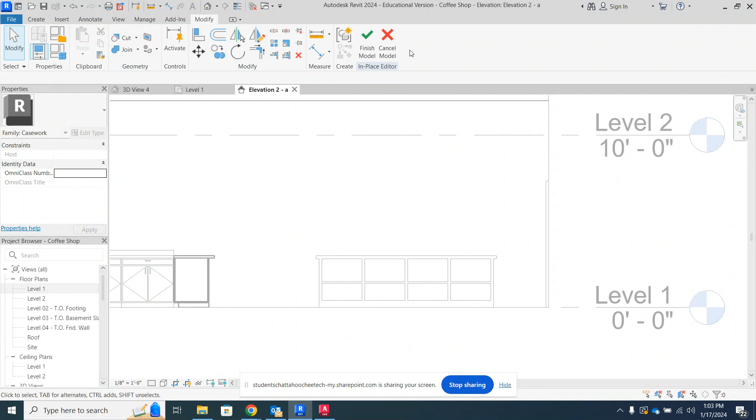Now we're going to work on the upper part of this shelving unit. So we're going to do the same thing. Let me get out of this. You're going to go to Architecture, Component, Model in Place.

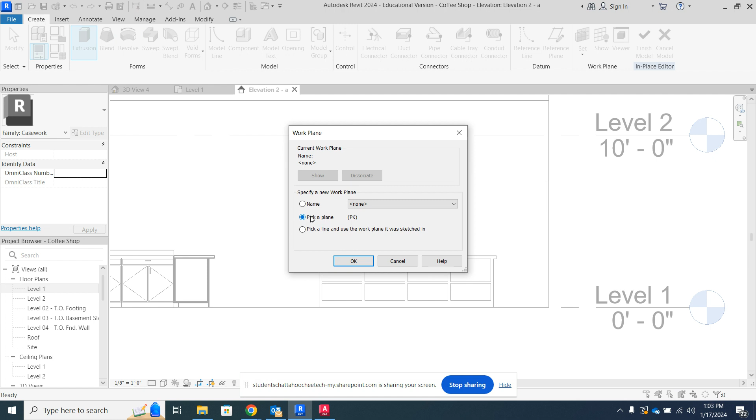Again, we'll choose Casework, give it a name, Shelf Upper Unit. And then we're going to choose Extrusion again. Make sure we're on Pick a Plane so we can choose which surface. Lots of times I'll scroll out a little just so it makes it easier to make sure I've got the top and the bottom of that wall. And then when it shows me my lines, I know that I've selected the correct one.

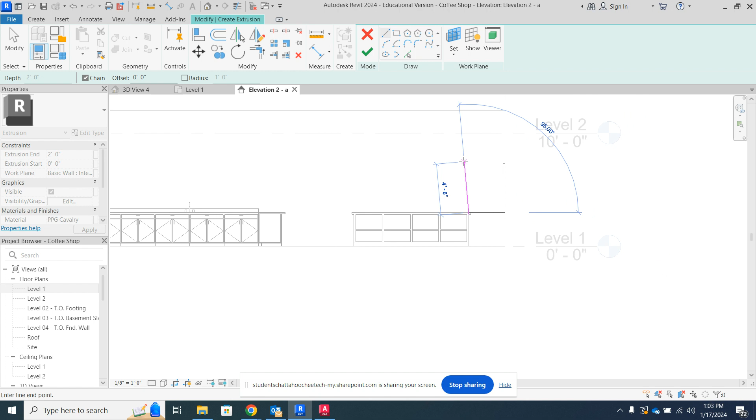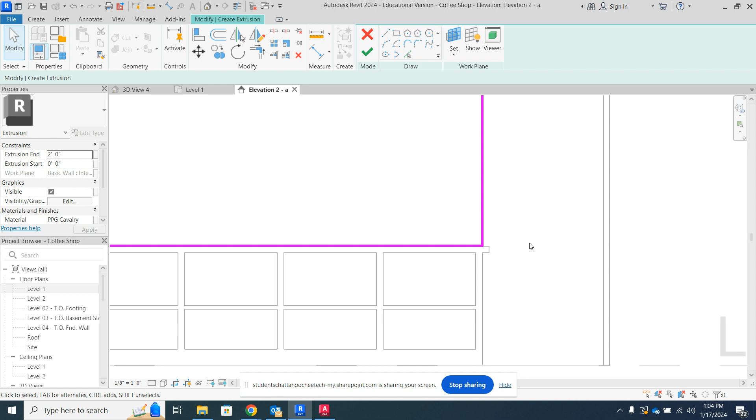So again, you can use your existing lines to start from. Since the bottom is 3 feet, I'm going to make this top 6 feet, so we get a total of 9, and then 10 feet should match up right where we want it. This will use these lines that are here as guide points, but it's not going to connect the surface to it, so they're still going to function as two separate pieces. I'm going to get rid of my starting line there.

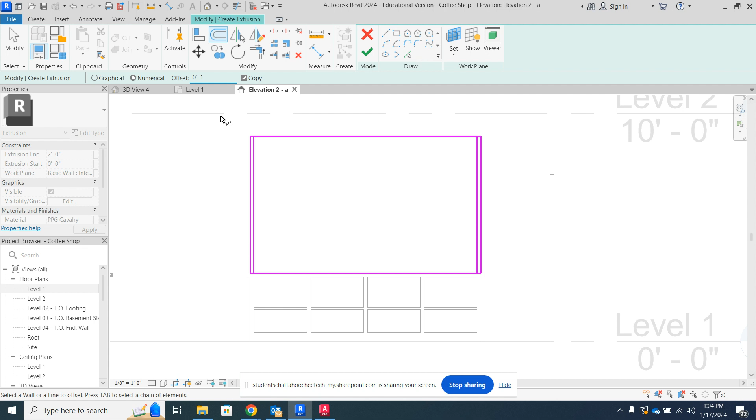So same thing here. You will go in, you can use your offset to create the edges of it. I'm going to do a little bit less at the bottom. So that's here. And then we'll go a little higher at the top. So we have all of that. And then same thing, you'll need to make sure that all of these are clean so that you don't have any lines intersecting as you go through.

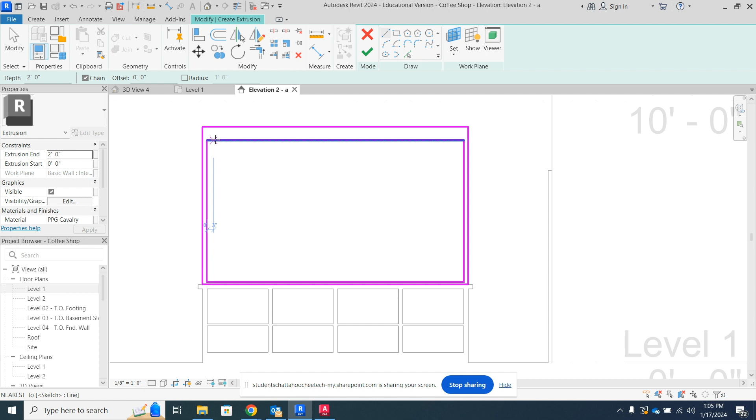So let's see, I did this 10 feet, so we'll do some quick math. We'll come in and make the sides each 3 feet away. You'll see it's giving me a dimension as I go through, and that should give me like a 4 foot in the center. And then what I will do again on my offset, now I'm going to come in 2 inches and come to the inside of this because I know my middle one is wider, so I've got some extra room there.

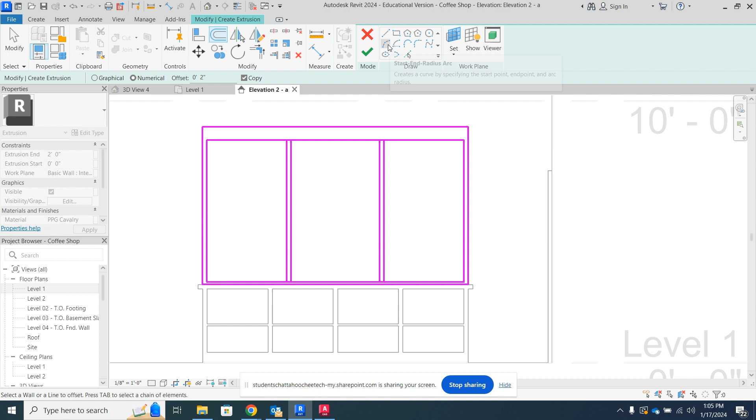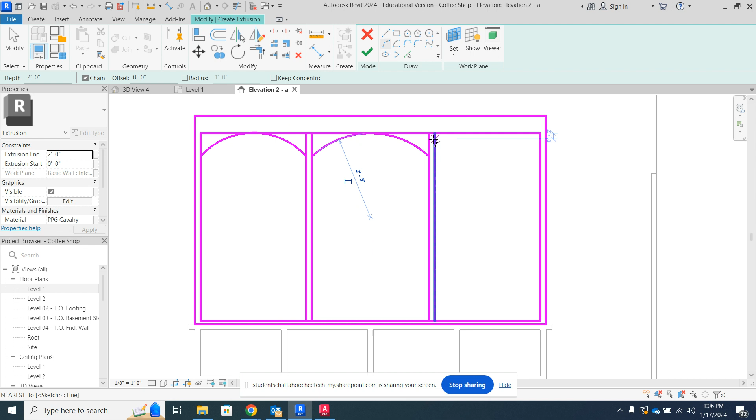The other thing you can do is create arcs in here as well. Typically I like to use this first, Start-End-Radius Arc, and I'm going to come from my corner, come down. We'll say we're going to do 8 inches, go across, and then bring it up to the top. We'll do the same thing here, make sure that it's even. You can see it's very easy to add the arches, and then you're just going to come back and delete your guiding line.

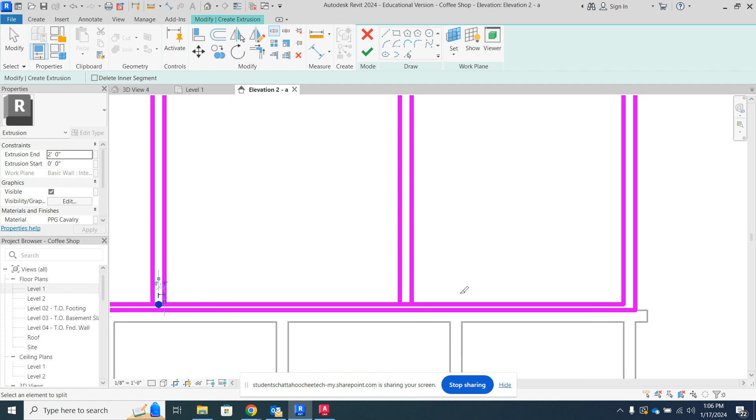And again, use your trim extends to clean all of that up. You will again need to make sure that you're splitting your line at the bottom here to clean that up. And if you forget, it will remind you when you try to close out of it, just telling you you've got overlapping lines, and it'll highlight them in orange.

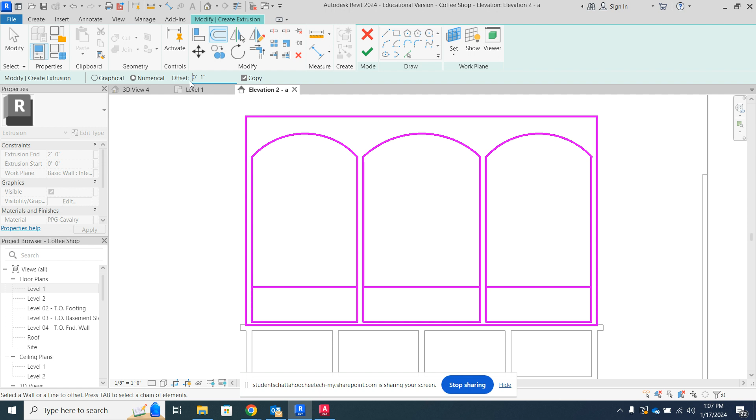And then we'll do shelves again. So for this, I can come up and let's say I want it to be 1 foot for my shelf. I'm just going to come across to that same one, and I'm going to use my offset and we'll just make it 1 foot 1 inch for each one. And then I'm going to come back and we'll just kind of go back. No, 1 inch will go below it.

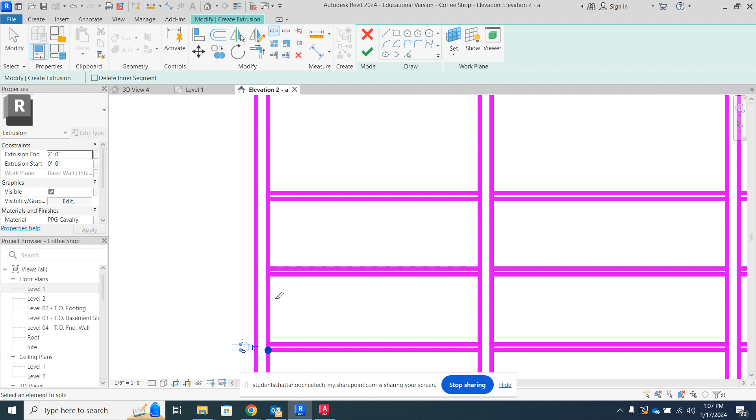Again, you've got to make sure you've got the thickness of any of your shelves, any of your edges, all of that. And then once again, you'll need to split the line at each of these so that you can intersect, and clean that up.

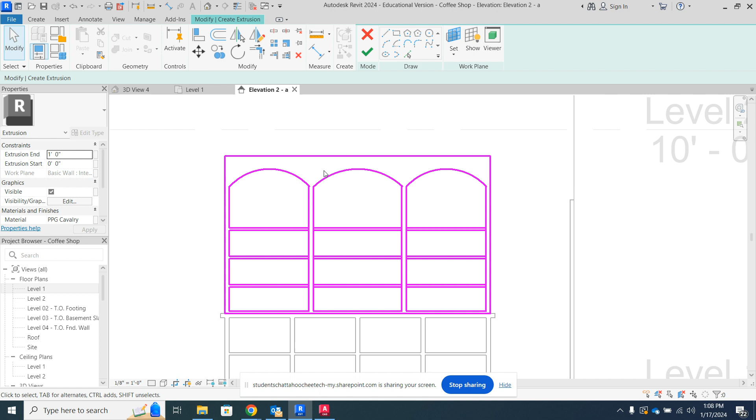So when you do that, you finish your design however you want. You're going to go under properties, change your extrusion to where it needs to be. I'll make this 1 foot here. Again, clean up all of these, and then you'll change the material so it can be the same or different. And then you'll hit finish edit mode. Remember, you'll have to hit that twice.

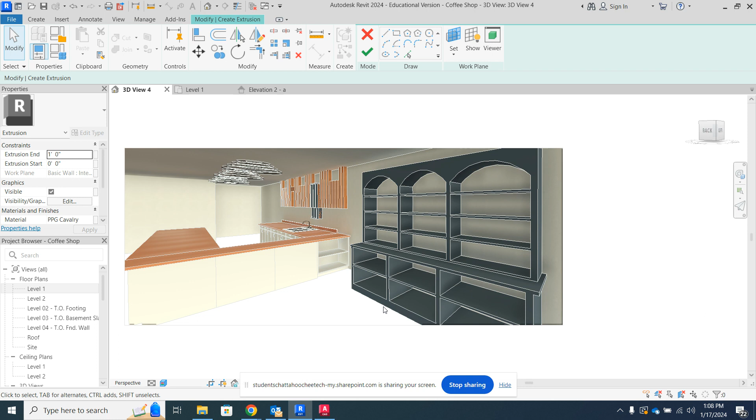And I'll just go back and show you. So what it's going to do then is give you this, the two layers, and you'll be able to see it at the top on your floor plan and when you go to your 3D view as well.